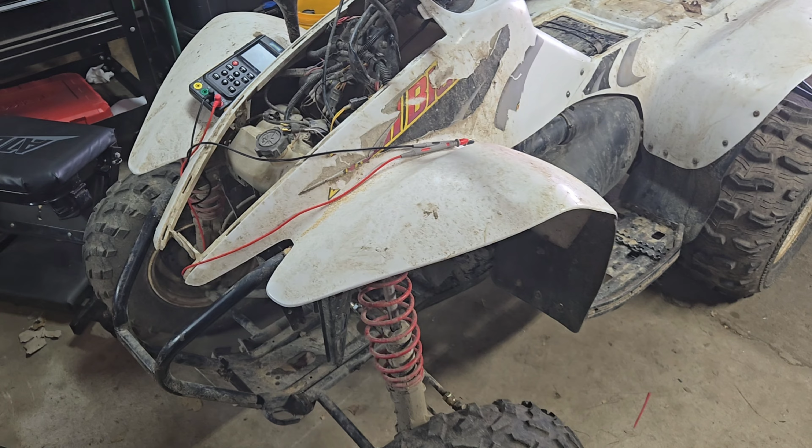Got some Polarises in here today. One of them is going to be a parts donor so the other one can live. It's going to be pretty fun. This white one here was resurrected from the dead not long ago. It had another donor. I know, seems wild, right? But it needed some love, needed some carburetor work, had some electrical issues and some suspension issues, and needed a belt, things like that. But we got it up and running. This is an 02 Trailblazer 250 two-stroke made by Polaris.

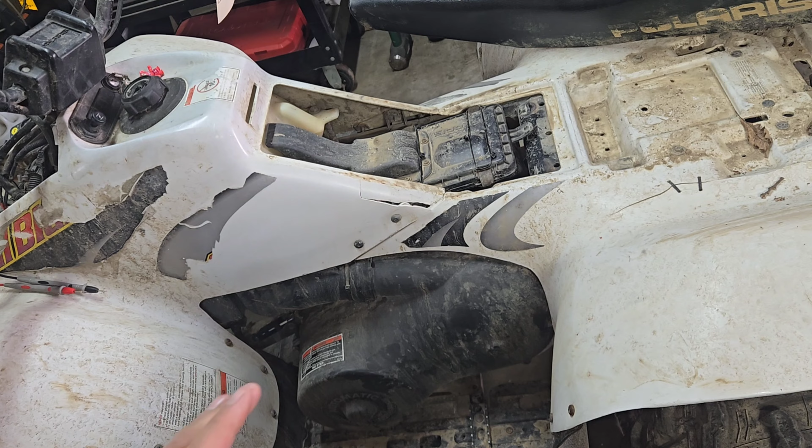So after we got this back to the customer, grandson was running it, got it off-road and stuff like that, and was loving it. So he had this one. Then he brought me this one. Said, Ty, he did great on the white one. Let's get this one going. Well, turns out this one's got some engine issues. And I made another video about my findings inside of that one.

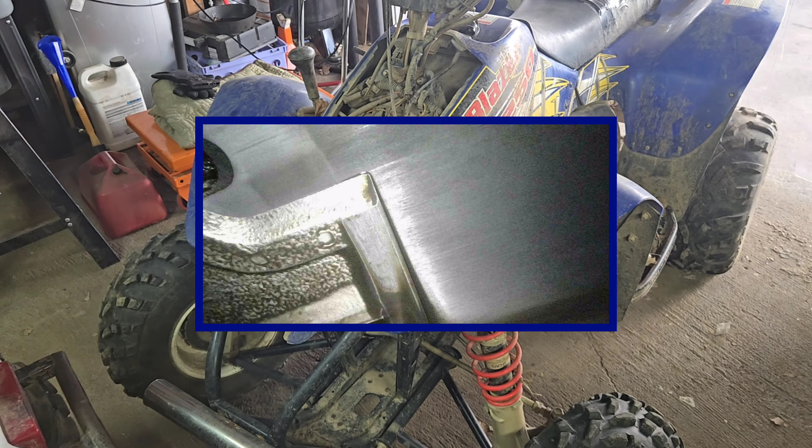And essentially the cylinders are washed down with all kinds of scoring and scratching. The air filter boot wasn't even on this one, so it sucked in a lot of dirt, it looks like, in its time. And it has maybe 80 to 90 pounds of compression soaking wet. It'll start okay if you choke it enough to get the cylinder wet to build compression, but once she's hot, she doesn't like to start. So that's kind of unfortunate, but that's where we are with that one.

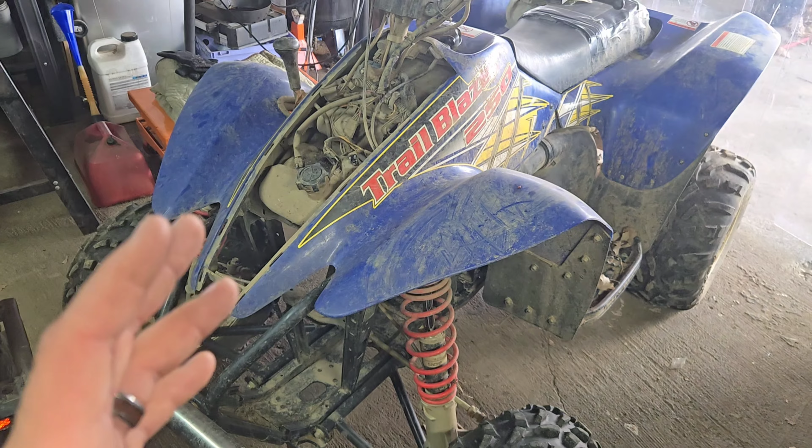While this one was here and we found out all these problems, this one came back. He said, Ty, it just stopped starting. And we found out we've got no spark. So here's what we got to do. This one's going to cost too much to fix because of the amount of parts required to get this old thing going. He said he could probably find another used four-wheeler for the price of fixing this one, and I agree. Absolutely. It's going to be quite a bit to do a whole rebuild on an engine. So we're going to rob the parts from this one to fix this one and keep this one going.

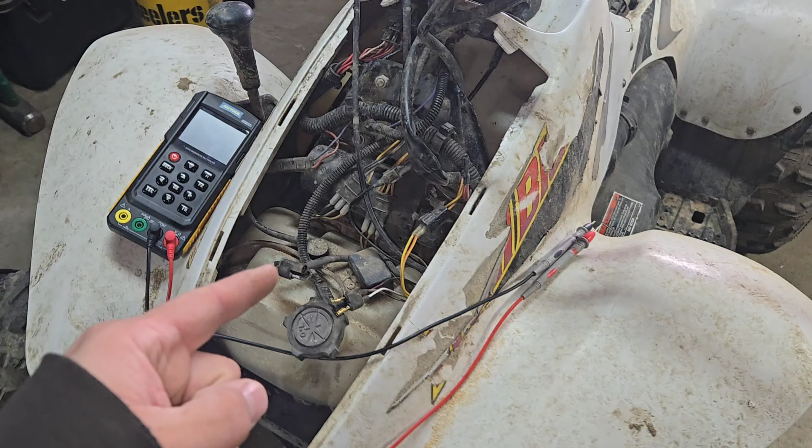Well, with our no spark verified on this guy, we're going to get into these components here, and we're going to talk about the troubleshooting that Polaris recommends, and then we'll talk about the other components we got to do on here too. So this is Troubleshooting 101, how you diagnose failed components. And it's kind of cool to have two units here together, because you know you've got one that does start and run okay and one that doesn't. So you can compare components back and forth, from a known good part to one that's failed, to test things yourself, which is kind of nice. Diagrams, troubleshooting tree, hang in there, we'll get through this.

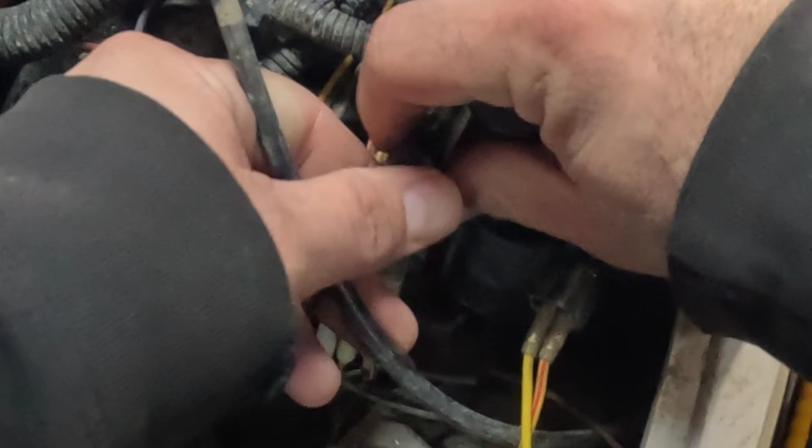We know this one starts and runs, but this one won't start. So I had a suspicion. I wanted to check first the stator here. I disconnected anything that was going to be the safety kill on this feller here. So when you've got your ignition box here, your CDI, usually you're going to have a kill wire that comes out of here, which is the single wire right here. If you disconnect this single black wire, that should disable all of your different safety kill circuits. Even if you got this thing to run, you go to turn the key off, it wouldn't die because this wire is not going to ground it out. Same with the handlebar switch. Either way, I've disconnected this switch, still had no spark.

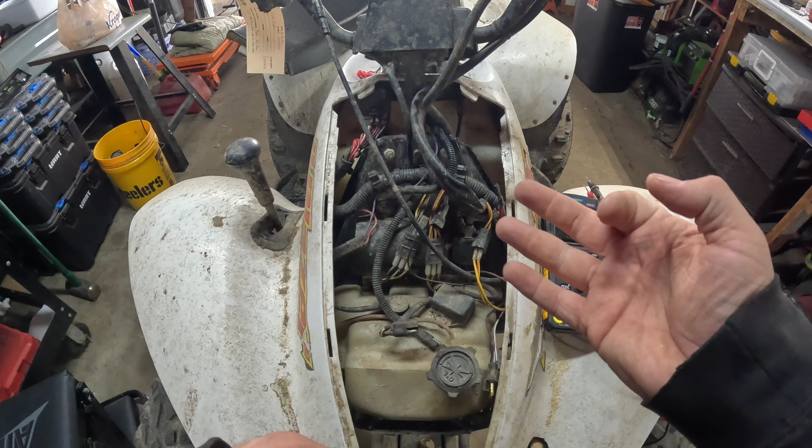With that being disconnected and I'm getting no spark, it leaves three things really. It could be the CDI box or the actual coil pack in here. And for the sake of argument, the coil pack, the spark plug wire, and the spark plug boot are all part of the coil assembly. They're all one. So it could be a bad wire, a bad boot, connector. I'm still calling it the coil pack. Or it could be the stator, which is going to be underneath the magneto down there.

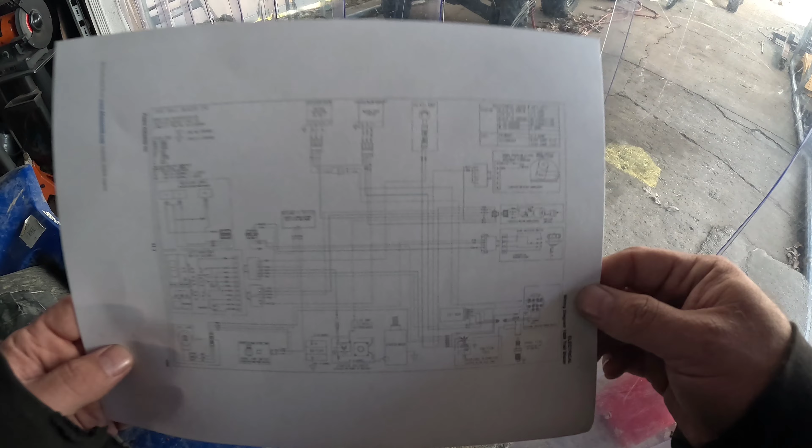Good thing about being Polaris, we've got good documentation here. We can look at what the specs are going to be for the stator and the coil, and we can check these. So I just wanted to check real quick the stator itself, because I'm thinking that water got in and shorted the stator out down there or something. But there's an easy way to check. Polaris has pretty good troubleshooting guides.

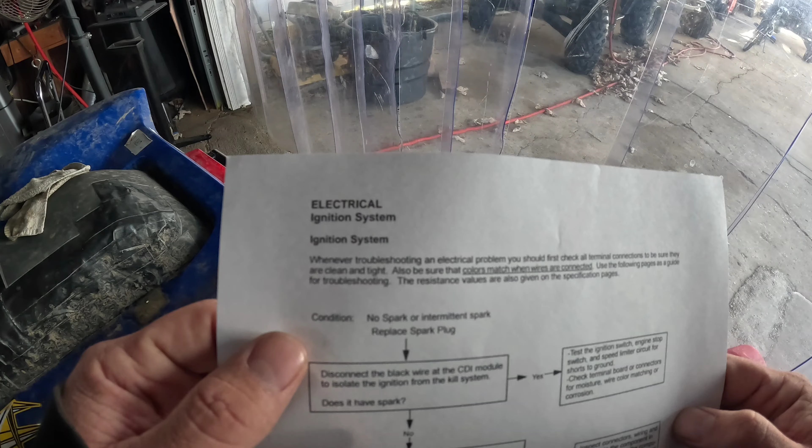This is the electrical system. You can go down here, no spark or intermittent spark. Disconnect the black wire from the CDI module to isolate ignition system from kill system. Does it have spark? Yes or no? No. Okay, we go down here.

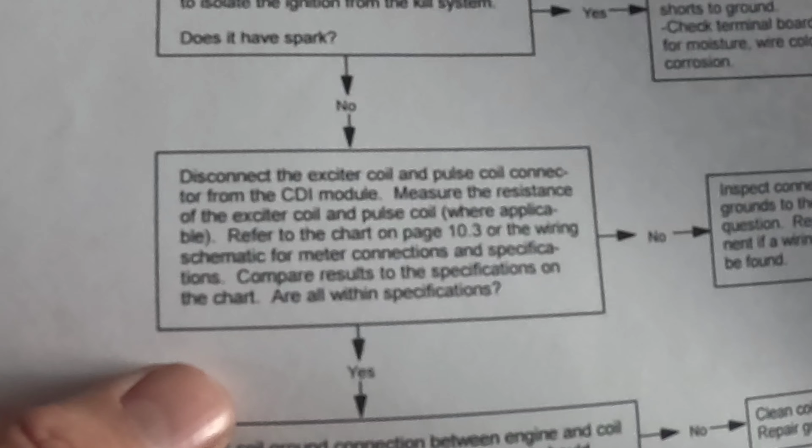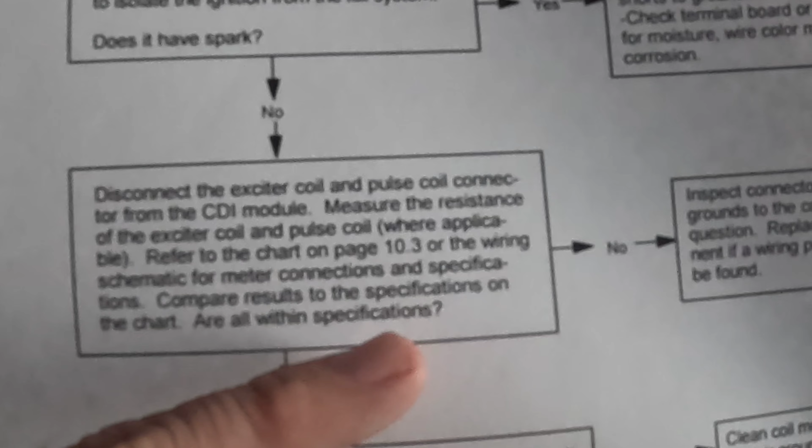Disconnect the exciter coil and pulse coil connections from the CDI module. Measure resistance of the exciter coil and pulse coil where applicable. Refer to charts on pages 10.3 or the wiring schematic to meter connections and specifications. Compare results to the specifications on the chart. Are all within spec. So this is where the test is.

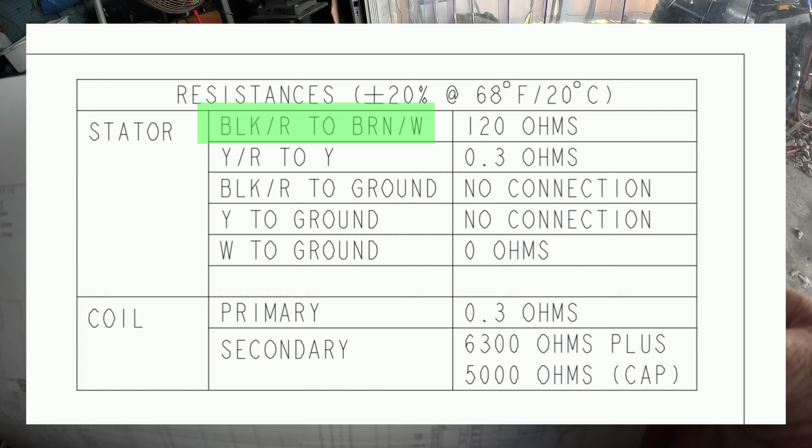They want you to check from the stator, from the black red wire to the brown, should read 120 ohms, and then the other yellows on there are going to be the generator wires that do the charging system. So we're looking down to the three wires that come out of the stator that are in charge of ignition, which is a black with a red tracer, a brown and white, and a solid white.

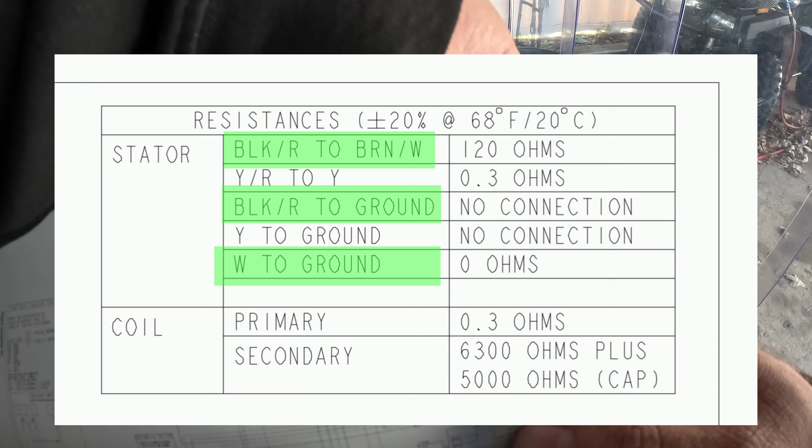So it's going to be this top line we're testing here, the third line, black red to ground, that should read no connection, and then white to ground should be 0 ohms, so it should tone out. So when you're talking about what these are, this is what's going to be coming from your stator, this 3-pin here, and it should be this guy. Yeah, the yellow, red, and the brown here.

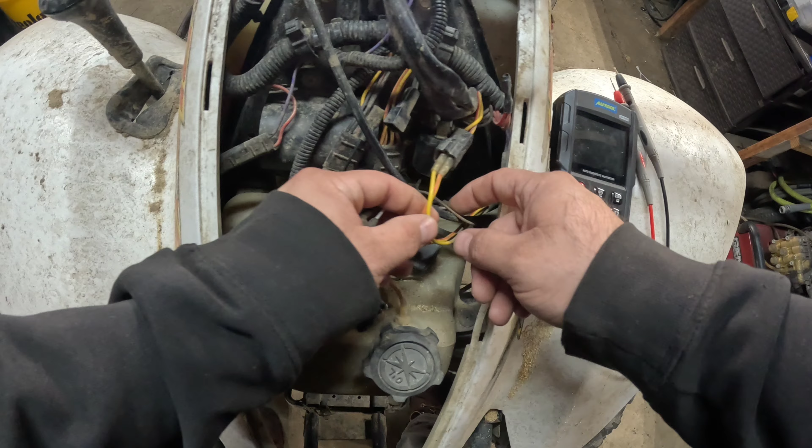So one goes to the grounding on the coil. Here's your 2 exciter leads that come from the stator itself that go into your rectifier along the way here. I know I keep throwing the term stator, but I want you to know that there's actually 2 different components down there under that magneto.

You actually do have your general stator, which is going to produce your voltage for your charging system, which was with that yellow with red tracer and yellow wire, and I think there was another ground that came from there for your charging system. But there's also your magnetic coil pickup down there, which just looks like a little half moon, 2-bolt, some windings for your trigger pickup. So technically that little 3-wire pigtail I'm showing you is actually going back to our coil pickup, which is mounted in the same orientation as the stator is, beneath the flywheel.

So I just wanted to specify that there is 2 different things down there, where the stator and the magnetic pickup are 2 separate pieces, but when their wires come out, they go together in a wiring harness and come up through the chassis up to the front under the front cover here. So I just wanted to clarify. I keep saying stator, but we're actually checking that magnetic pickup, which if you follow the wiring diagrams, you would know what I'm talking about anyway. So I don't want to lose you or confuse you, but that's what we're checking here right now.

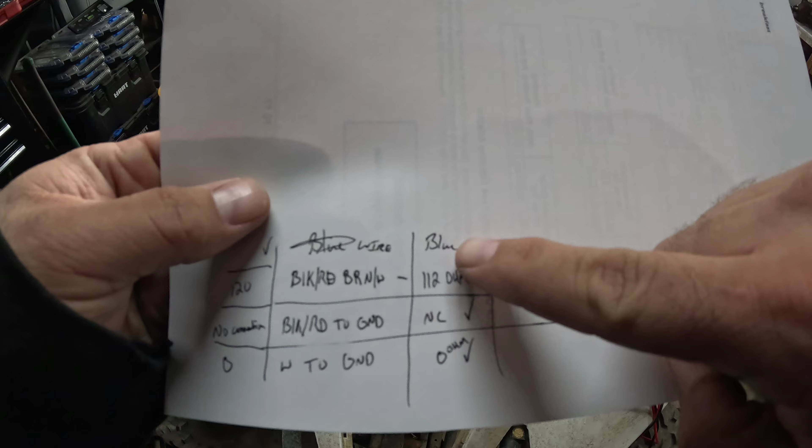But this is the guy that goes to this connector, which then in turn goes to your CDI box. Then your CDI box has its output wires that go to your coil and then your kill circuit here. So we're going to check this right here on the meter. Already got a little cheat sheet right here that I've made up. Just ignore my scribblings. So I've got the blue 4-wheeler, which is the one back there in the white. I know the blue one runs.

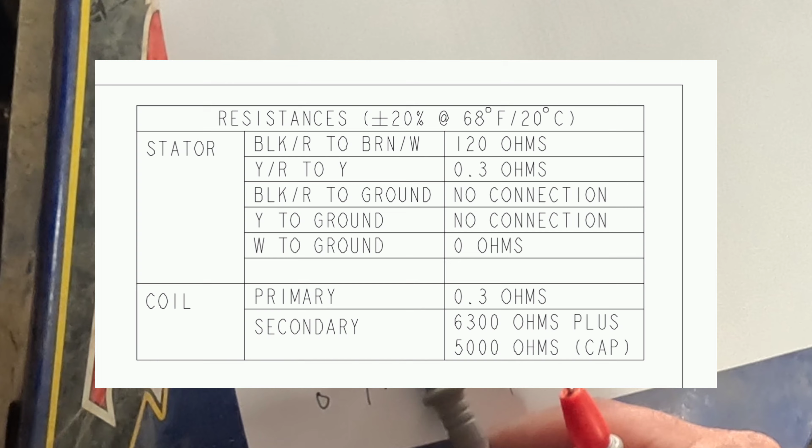I've got my meter set to ohms. I can see my reflection. Touching, we got contact 0 ohm. All right, we've got from the black with red tracer to the brown and white. We're supposed to read 120 ohm as a spec, plus or minus a percentage, which is on the diagram. So if we go the black and red to the brown and white, black and red is this bottom female connector, and then our top left one here, which is the brown and white.

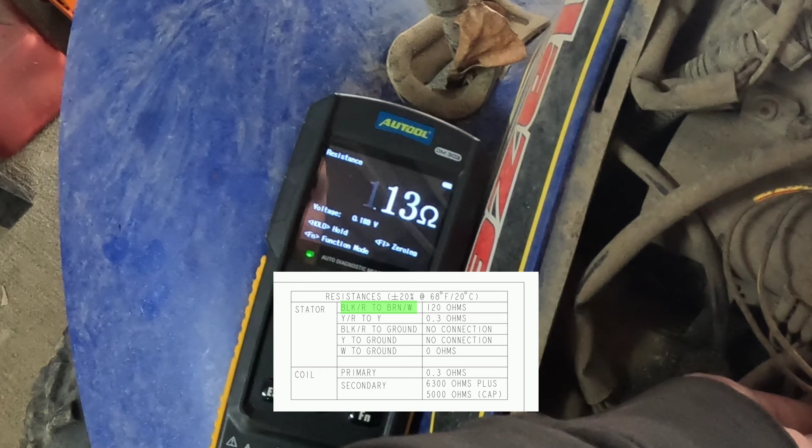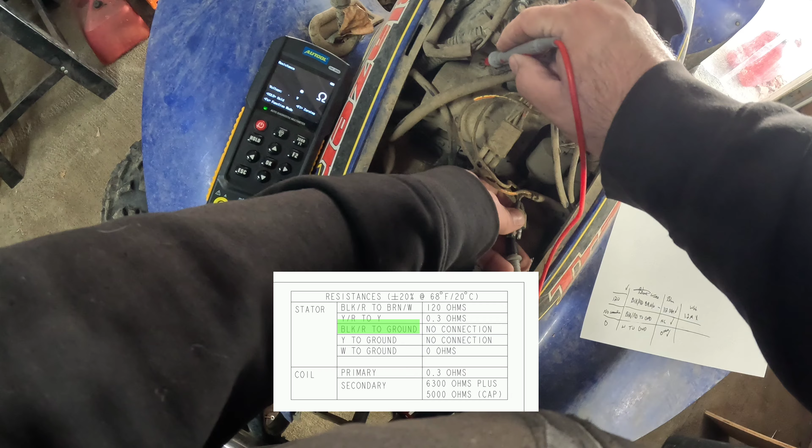If you see, we've got about 113, 114 ohm, and our spec is 120, so that's within spec there to pass. That's good. So now we're going to switch it over from the black red, so we're going to leave that down here, to a ground. So we're going to find a good frame ground. I'm going to pick these bolts up here. We should have no connection. I'll pick another bolt, no connection. So we're going to take this out of the red. We're going to go into the solid white, which is right here, to ground.

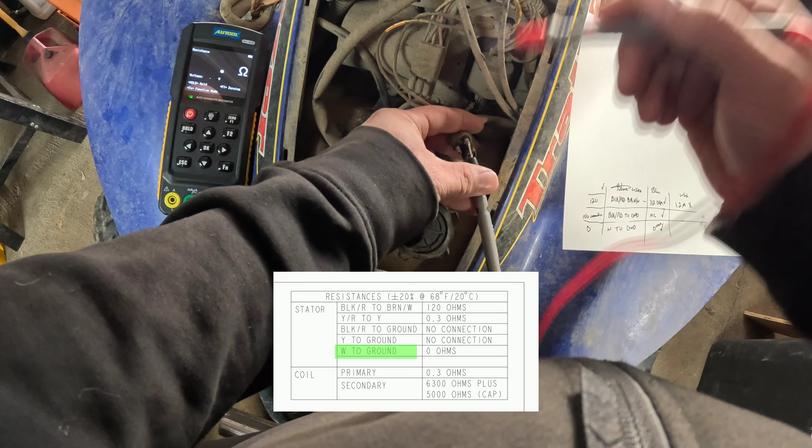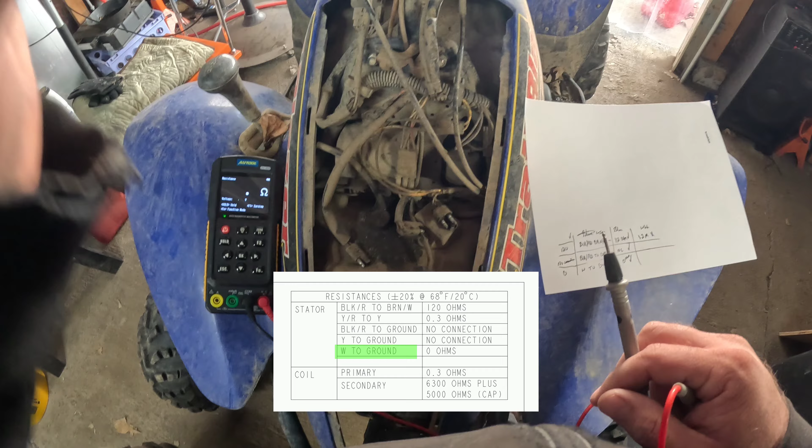This should tone out to ground. So I've got it held here. Goodness sakes. Got it held in here at the white. Go to ground. We tone out. That means that down there, as far as the pulse signals and everything going, the pickups coming from the stator that are in charge of spark are okay. They're within spec. Now let's move on to this white one and show you what it's reading. I know my results are already on my page here, but walk with me here.

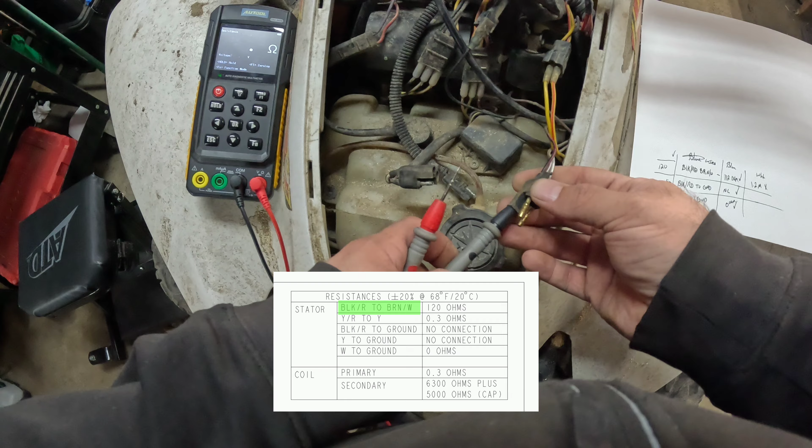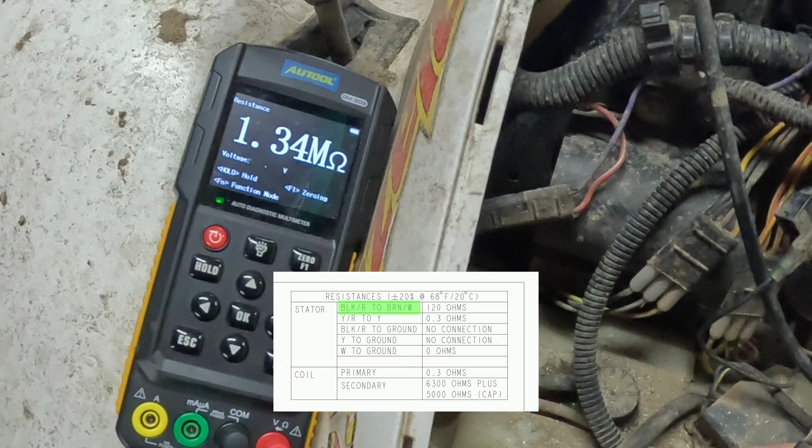Same deal. We're going to go from the black and red to the brown and white. Watch this meter. She starts building resistance. It's pretty wild, isn't it? Maybe just give her a couple little taps here. Kind of break it and bring it back. So we got 1.3 megaohm. That's way outside what it's supposed to be, 120 ohm, and we're in a whole different range above, so that portion is bad. We got 1.2 megaohm up here.

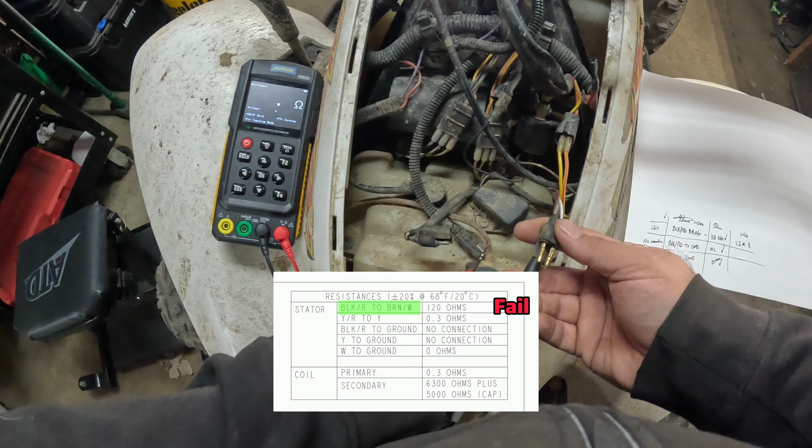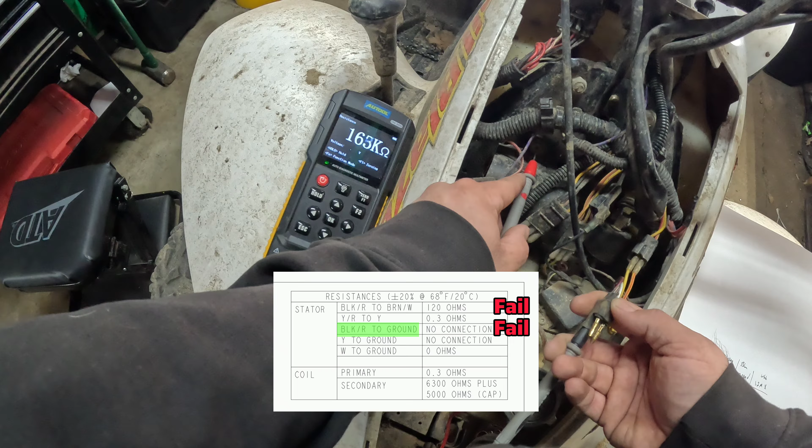So now we're going to go black red to ground. We're on black red. Now we're going to go to ground. Let's see what we got. Look, we got a reading when we shouldn't have. 165,000 ohm. That's insane. So there's supposed to be no connection there, but clearly we've got a connection. So that's not good. That fails outside of the range.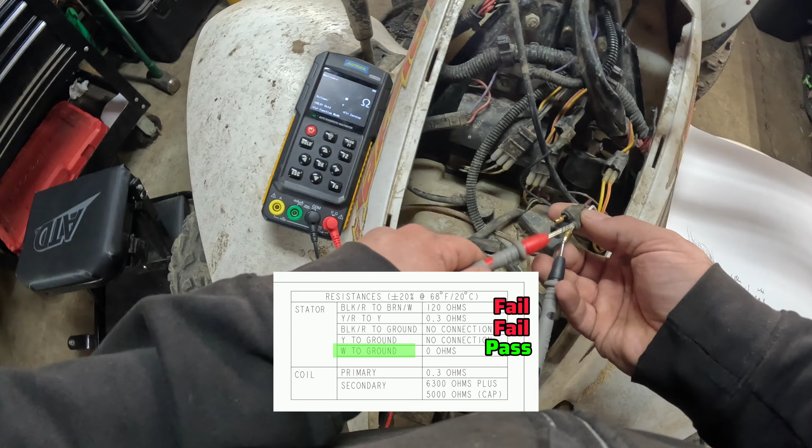And we're going to go from white to ground. I'm going to move this up from white and then to ground. So at least we know our ground wire is about the only good thing, because that white should go to the stator plate down there for ground. So that one is the only one we got that's good.

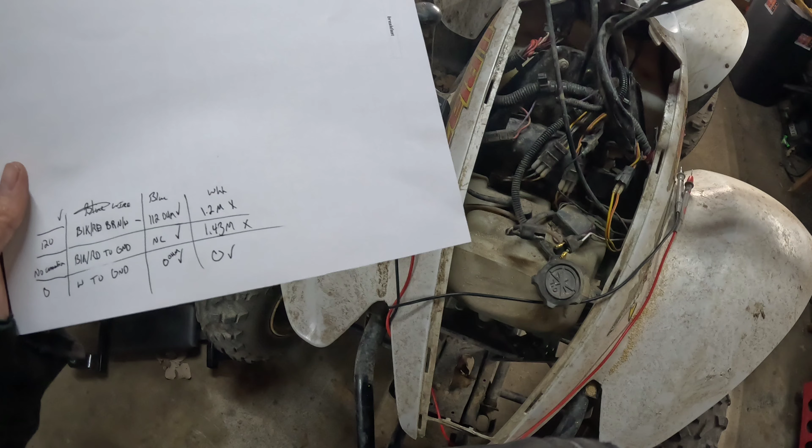So this is what's in charge of exciting the CDI module to send the spark through to the coil pack, to the spark plug boot, to the spark plug to ignite the fuel in the motor, and we ain't getting that. I've already identified that the hardest work has to be done, which is to change the stator on this unit here. And what sucks is we're not going to be able to pull it out of the box and bolt a new one on there. We're going to be using the donor stator from this blue one. So it's going to need to be pulled and put onto this one to get this one fixed. So it is what it is.

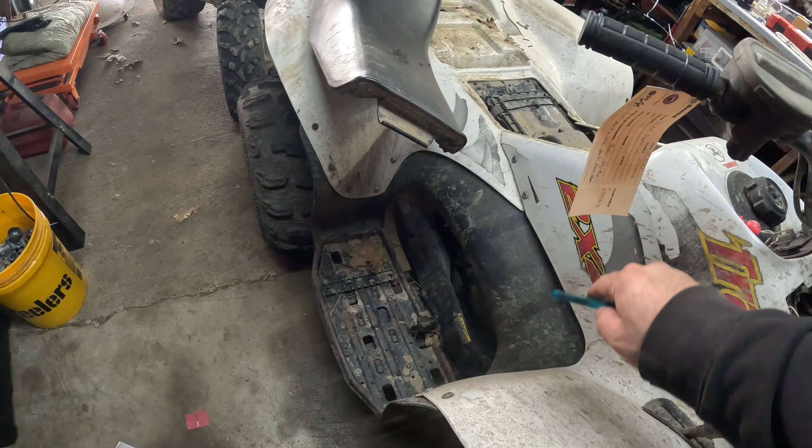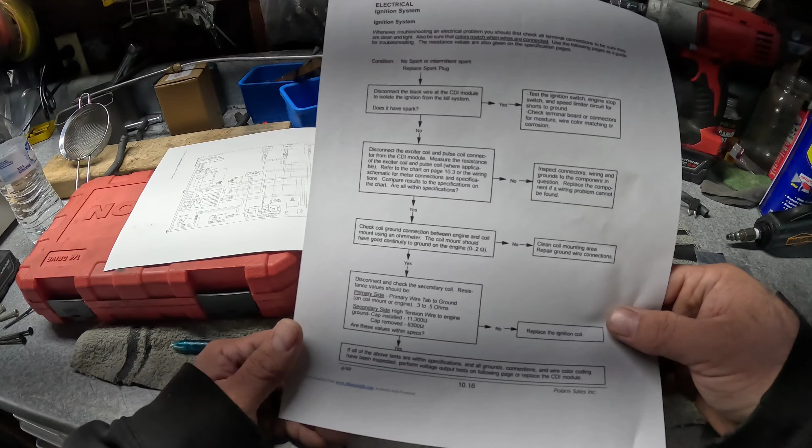Going to have to be some extra work done down here to make sure this is nice and watertight, because I'm assuming that's probably what's got down in there and did some of the damage. Then we're also going to check our coil pack too, and just make sure that it's within spec. Following our Polaris troubleshooting, after we check all of our modules here, we get the stator replaced down there, moving on. Okay, now we have stuff within spec.

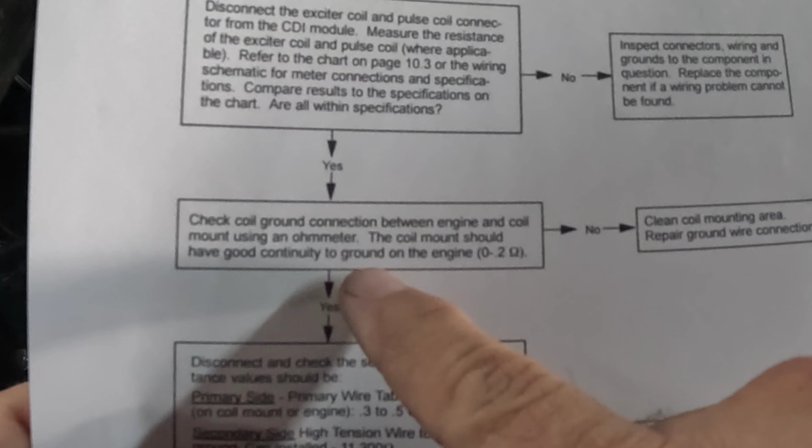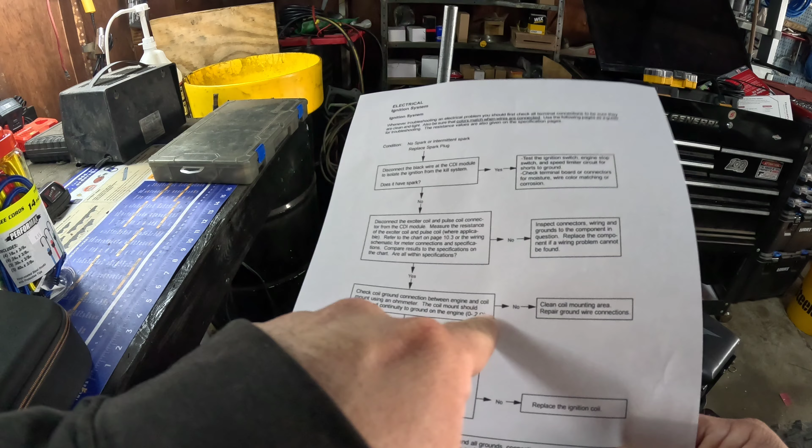Cool. They want you to check the coil ground connection between the engine and the coil mount using an ohmmeter. The coil mount should have good continuity to ground on the engine. So basically they're just making sure that the body of your coil pack is mounted well to where it's grounding through itself. That's why they want you to clean the coil mounting area and repair ground wire connections if you're not getting a good connection. Then they want you to disconnect and check the secondary coil resistance. The primary side, which is the wire tab, that little guy down here where the wire comes out of your ignition module, from that to ground should be 0.3 to 0.5 ohms.

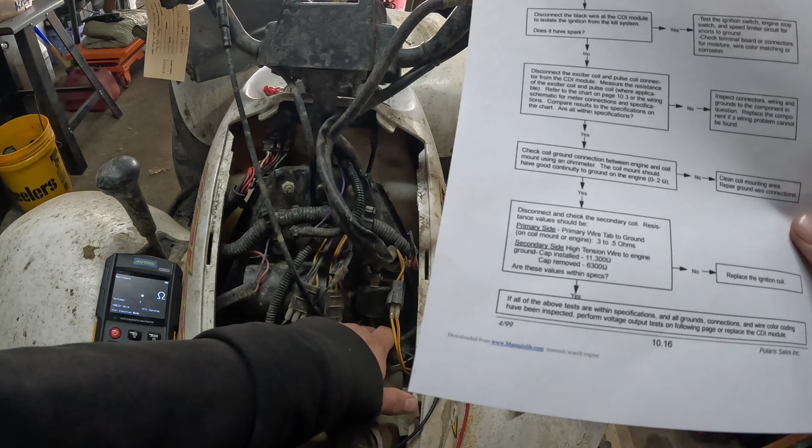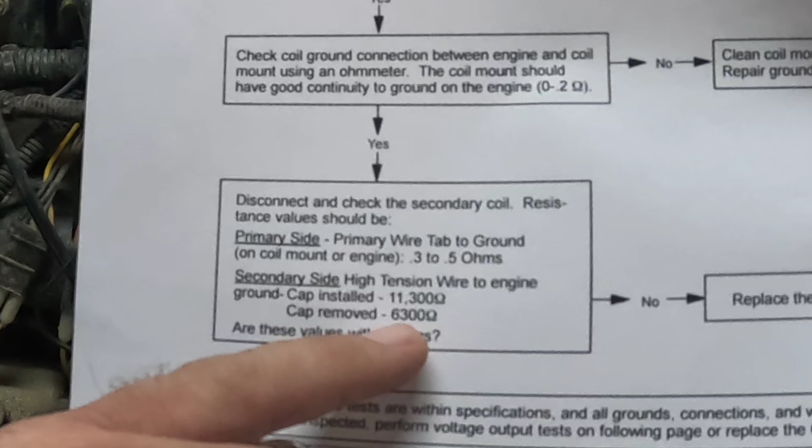And then the secondary side, which is the high tension wire to engine ground, cap installed. So what they're calling the high side is inside of your spark plug boot. That's why they're saying the cap installed. So if your boot was on your wire, that should be your reading between here and engine ground. If you have that cap removed, you're just checking through the wire, it should be this reading, because there is in that spark plug boot a built-in resistor.

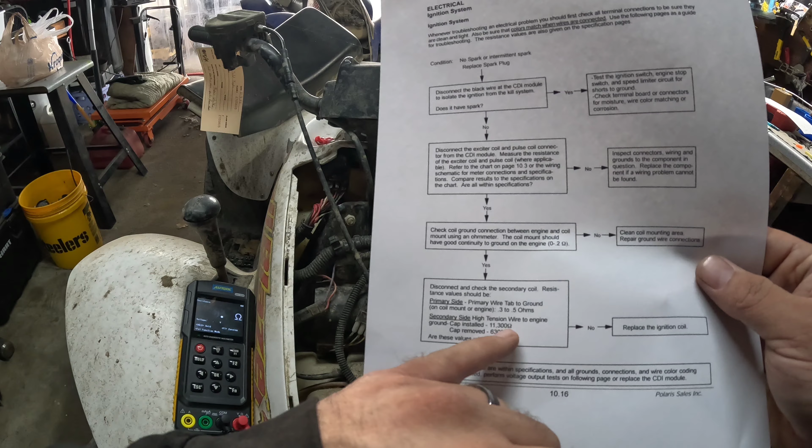And if you measure the difference between 6,300 ohm and 11,300 ohm, quick math on that one, it's 5,000. So that spark plug boot adds 5,000 ohm of resistance, so that's why it drops down. And if you don't have this reading, they want you to replace the ignition coil. So we're not there yet, but that's what you're gonna have to do if you want to check that.